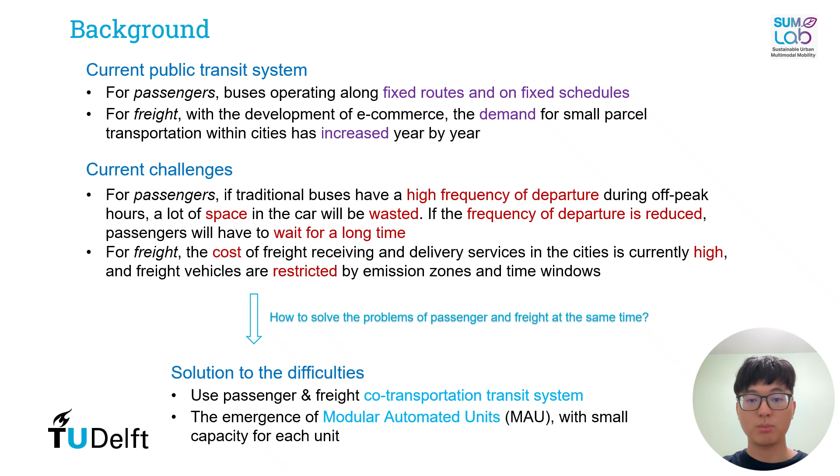However, there are some problems with the current transit systems. For passengers, if buses have a high frequency of departure during off-peak hours, a lot of space in the carriage will be wasted. If the frequency of departure is reduced, passengers will have to wait for a long time. These two can hardly be balanced, and freight delivery also has a lot of restrictions. So the problem is how to solve these problems at the same time. The answer may be to use modular automated units in co-transportation transit systems.

Next, I would like to discuss the gaps in the current literature. Since modular transit systems are still in their infancy, most studies on them focus only on passenger transportation. FRT here means transportation on fixed bus lines, while DRT means transportation can be provided at stations that have demand outside the lines. Although most studies for pure passenger transportation use a combination of FRT and DRT transportation modes, most of them are limited to a single line and nearby areas.

As for co-transportation systems, as shown in the figure above, the studies only consider FRT or DRT. Therefore, this study considers the direction missing from existing research and combines the two service modes on a network consisting of multiple lines and additional stations, while using the co-transportation modular transit system.

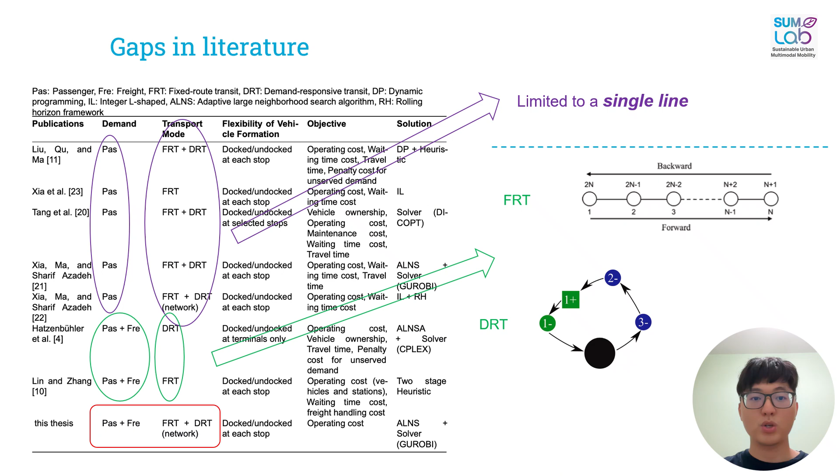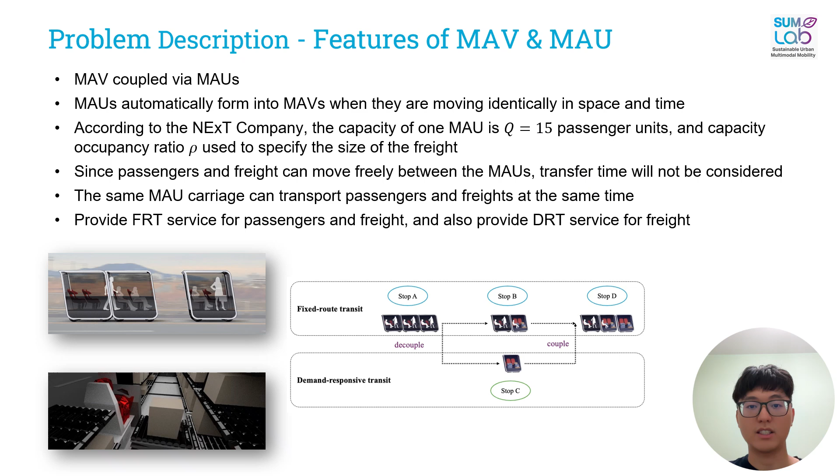This study uses the modular automated unit developed by Next, whose technology is currently quite mature. There are some features of this type of vehicle and some assumptions made in this study using this machine. MAVs are coupled via MAUs, where MAUs are moving identically in space and time. The same MAU carriage can transport passengers and freight at the same time, and the capacity is 15 passenger units. Four statuses may happen in one MAU carriage: only passengers, only freight, passengers and freight, and empty. FRT service is provided for both passengers and freight, and DRT service only for freight.

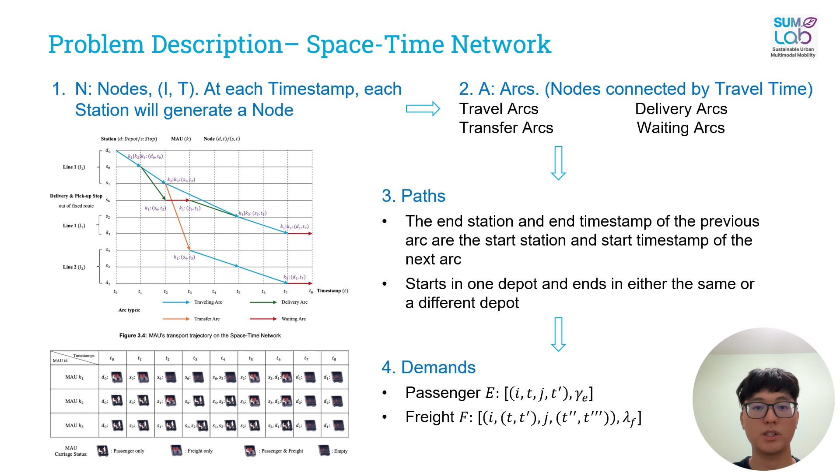Now, I would like to introduce how the space-time network of this study is established. Firstly, depots and stops with time steps constitute nodes. The picture on the left shows the possible trajectories of three MAUs and the corresponding status in the carriages. And there are four kinds of arcs that together form feasible paths. Demand is set in groups on each arc segment. Passengers have strict time constraints, while freight only needs to be completed within a time window.

This mixed integer quadratically constrained programming path-based model solves the route planning of each MAU. The objective is minimizing the cost of all paths that the MAUs pass through. Since MAUs are autonomous and powered by electricity, we use this form to calculate operating costs. The first constraint is the path assignment constraint, which ensures that each MAU selects at most one path. The second and third constraints ensure passenger and freight demand volumes do not exceed the total amount on the arc.

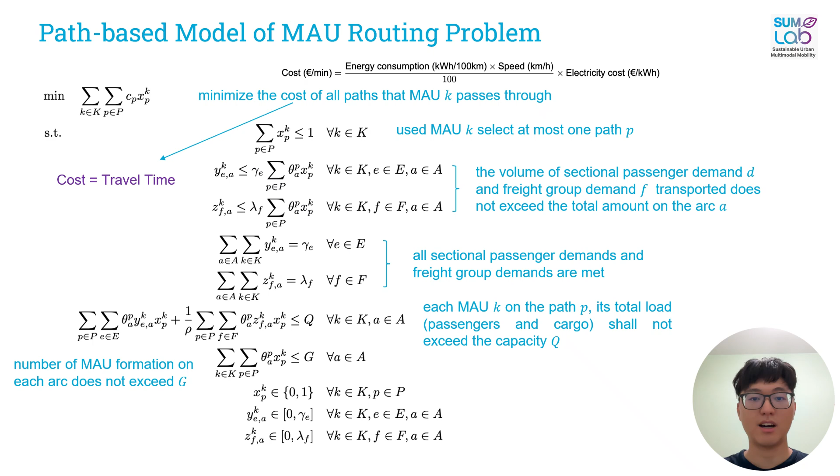The next two are demand satisfaction constraints, which ensure all demands are met. Then the capacity constraint makes sure that the capacity of each MAU compartment will not be exceeded at any time. Since we don't want to form a group of MAVs that is too long on a road, we set the last grouping limit constraint.

Different initialization methods can produce different quality initial solutions, but also have different computational times. We try to use two initialization methods, the Gurobi solver and the greedy heuristic. To speed up the calculation, not all paths are used. First, some paths containing the demands are selected. Then, for Gurobi, the result will be the optimal solution of this P demand. The advantage of this initialization method is that all constraints will be satisfied.

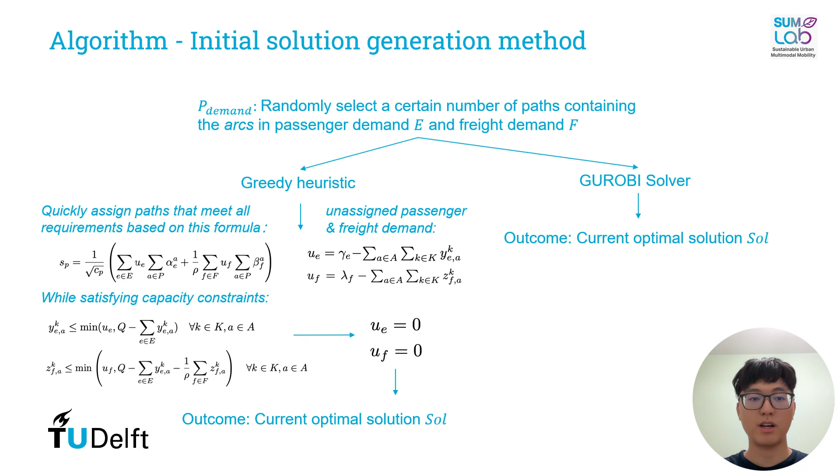In the greedy heuristic method, unallocated passenger and freight demands are first represented by UE and UF. Then, without exceeding the capacity of each MAU, this scoring formula is used to assign all passenger and freight demands. This process will repeat until both UE and UF are 0. This method will cover all demands onto feasible paths extremely fast.

Due to the complexity of the model, in early testing the Gurobi solver struggled to find a solution within an acceptable timeframe when encountering slightly larger datasets. So the ALNS algorithm, with its adaptive mechanism and fast convergence, was chosen.

The figure is a framework of the customized ALNS algorithm. We have just described how to generate the initial solution. The next step is to determine whether the stopping criteria are met. Simulated annealing is used. When the stopping criteria are not met, the destroy operator is performed first. The operators are divided into two levels, path level and arc level. If the path level destroy operator is selected, the path level repair operator will be automatically matched in the repair phase.

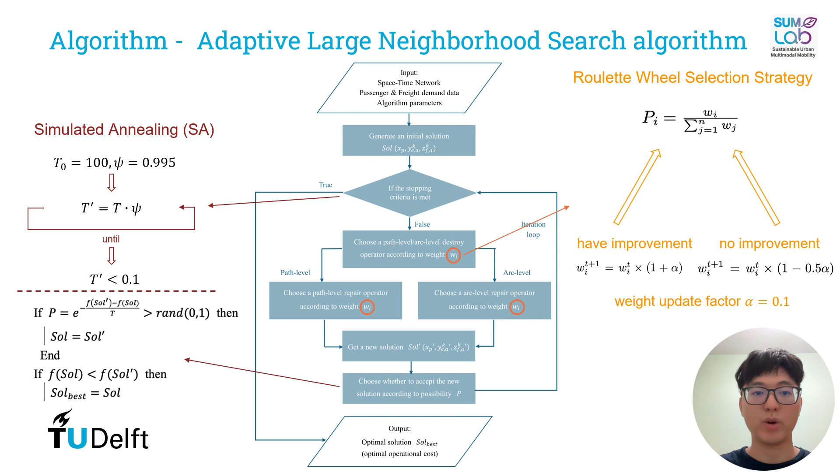The orange circled parts are the weights of the operators, which change depending on whether they have contributed to the improvement of the solution quality in the past. And the probability of each operator being selected is based on the formula of the roulette wheel selection strategy. When a new solution is obtained, even a worse solution may still be selected by comparing it with a random number between 0 and 1 through this probability formula.

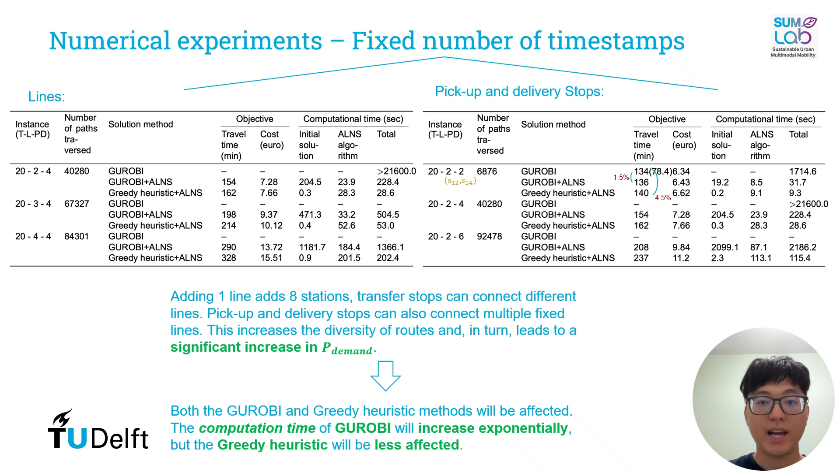From the results in the table, we can see that the number of connection points between stations on different lines will cause the Gurobi computational time to grow exponentially. The reason is that the diversity of paths increases, which leads to an increase in demand. The greedy heuristic method was also affected, but to a lesser extent due to the lower base. And this initialization method always has a better computational speed.

The following is a set of numerical experiments using a smaller spatial network with 10 to 120 time steps. The first two experiments demonstrated that Gurobi can produce an exact solution, while the other two methods achieved results within an acceptable range. It can be seen that the ALNS algorithm with the Gurobi initialization method is always faster than the greedy heuristic, and the quality of the solution is also consistently better. Therefore, we can conclude that the computational time and quality of the final solution of the ALNS algorithm depend on the quality of the initial solution.

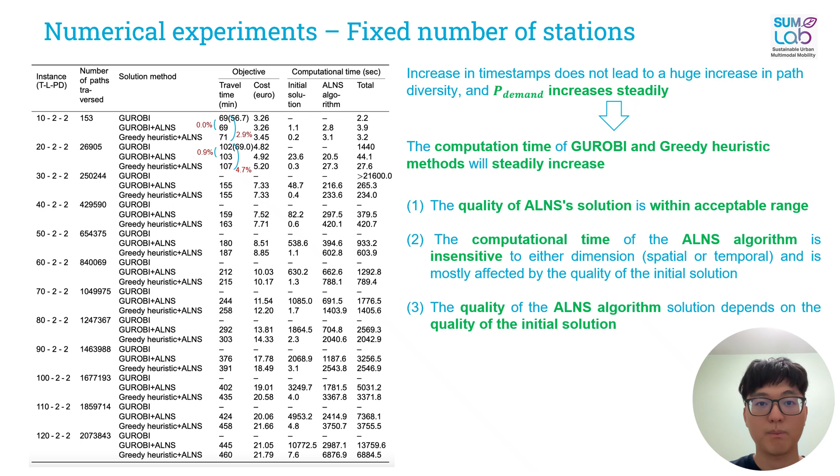In the final part of the numerical experiment, we conducted a case study using data from actual bus lines and pickup and delivery stations in a district of Shanghai to further verify the feasibility of the model and algorithm in real-world applications. A total of 2 bus lines and 4 express delivery points are used. The time is from 8 to 9:30, with the first hour being the peak period and the rest being the off-peak period. During peak hours, buses run every 15 minutes, and during off-peak hours, they run every 20 minutes.

The figure on the right shows the number of passengers and freight transported at different times. We can see that passenger demands will be prioritized. As the off-peak period gradually approaches, space begins to appear in the MAUs and freight demands begin to be processed. This is key to reducing costs, making the system cheaper than a separate transportation system and eliminating the need for 8 MAUs. Even the cost of a traditional bus plus delivery van combination was already 6 times higher in this 1.5 hour case study.

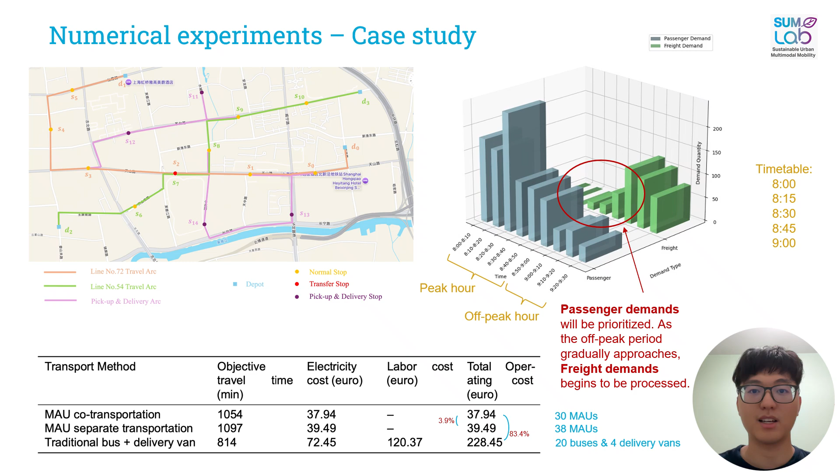Finally, the two main conclusions are that the algorithm for the MAU routing problem is effective and the transit system is efficient. ALNS has a huge advantage in computational speed and can achieve acceptable solution quality using 2 different initialization methods. At the same time, compared with the MAU separate transportation system, costs can be saved by 3.9%, and compared with the traditional public transit system, costs can even be saved by 83.4%. Therefore, the passenger and freight co-transportation modular transit system will certainly play an important role in intra-city transportation in the future.